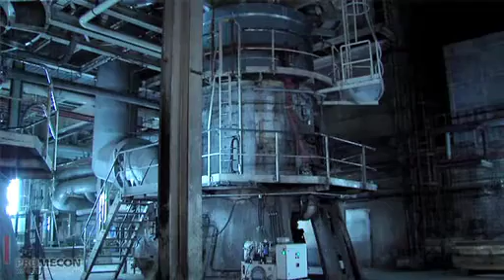Okay, when we're talking about coal combustion, we're actually talking about coal pulverization. The coal needs to be pulverized to be able to burn in the boiler. So the main machine for that is the pulverizer itself. Now, each pulverizer can be characterized by three main points.

The first one is the mass flow. How much can a pulverizer really throughput in 1 hour? How many tons per hour? The mass flow has a direct impact on the power of the burner. And the second one, of course, is while it's pulverizing, it's also drying the coal. So the raw coal comes in with 10% moisture and we go down to, let's say, 2% moisture. Can the pulverizer do that within the limits of its design?

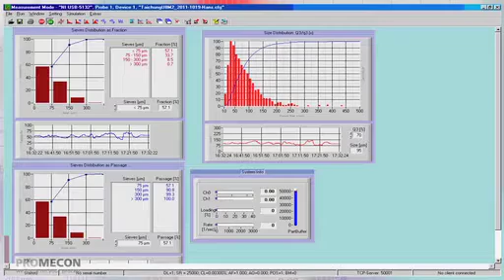And the third one, of course, talking about pulverization, is the fineness of the powder or pulverized fuel. The particle size distribution has an impact also on the mass flow. If you have more coarse material, you can grind more coal than if you have more fine material. So it all sticks together, and mass flow certainly is one big part of the whole equation. Yeah, certainly the mass flow, because that's perhaps the dominant input.

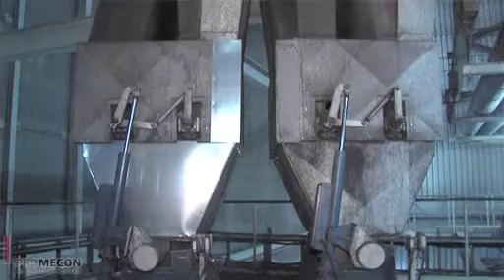I mean, do we really know what we put into the mill in the sense of fuel air? Do we really know what we take out? And do we know that that which we take out is uniformly distributed to each of the burners? And if we can establish uniformity from burner to burner, we could then seriously think about matching mill to mill.

And if at the same time we could maintain, say, a minimum velocity in the pipes such that we didn't get fallback of product and we don't have it lying like sand dunes in the pipes, then we'd be on our way to getting something like optimum efficiency. Yes, but that's definitely an issue of airflow through the mill. I mean, the airflow is at least as crucial as the coal mass flow.

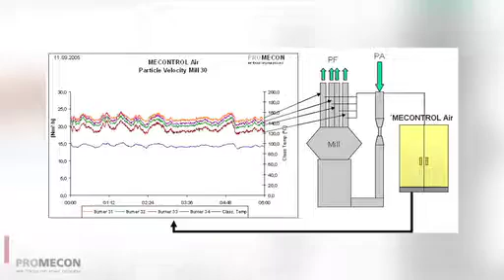We certainly have a problem to determine how much air goes into the mill, but the other thing is, do we know how much air is necessary through the mill? Now, with our new technology, you can measure airflow out of the mill, so you know what the velocities are as the mill is operating. And by that, of course, you can have a much better handle on the heat consumption, the drying process. And that itself has also, again, a big impact on the grinding, on the fineness of what comes out of the mill.

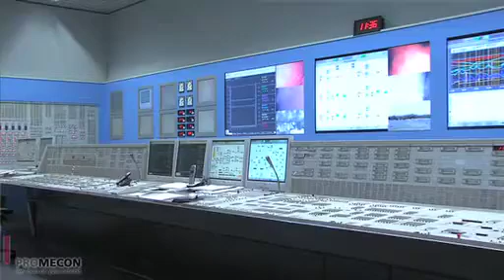Yeah, and coal fineness is critical to the combustion. The fineness is unique for each application, and if the fineness is just right, then you get that good flame attachment that you need for a low NOx burner. Of course, if the coal is being ground too coarsely, it's going to greatly affect the unburned carbon in the ash, and you can get flame impingement on the rear wall, the side walls, and all these parameters affect one another. If you're grinding it too finely, then it's going to affect that throughput. So one has to determine all these parameters and operate the mill correctly.

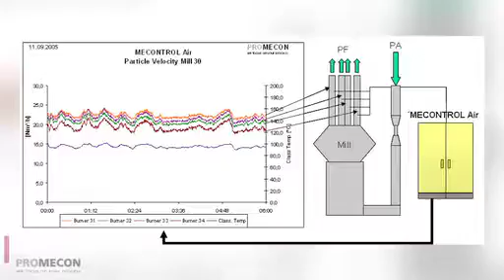Yes, but the question now is, what are the parameters that we should measure in order to wrap all this up? The first parameter that we have to look at is the air going not only into the mill but also out of the mill. So the air balance through the mill. Secondly, you need to know the coal, or the solid mass flow balance through the mill. So you not only need to know the coal mass flow into the mill but also out of the mill,

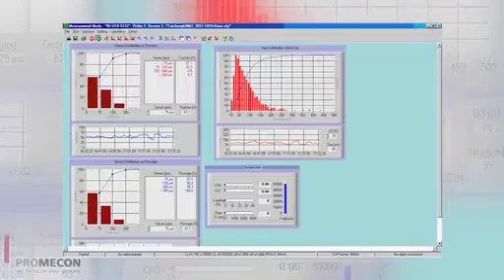including velocities. Thirdly, you need to have a fast temperature measurement on the classifier to control the drying process to a very constant operation. And last but not least, you want to know the final product fineness, so online measurement of coal fineness. So these are the four issues. This is what we want to measure online in order to optimize the performance of the pulverizer.